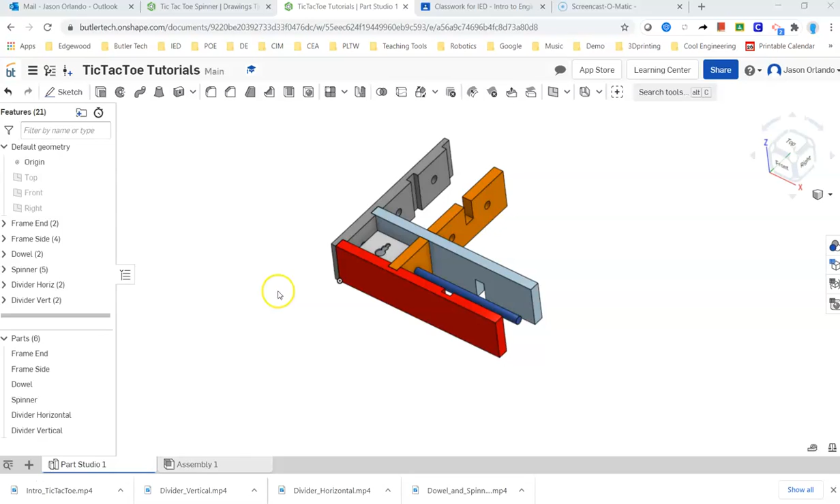Okay, welcome. We've got our 6 parts built and we are going to complete the assembly. I'm going to go ahead and move over to the assembly tab, and I'm going to work in the order in which I built the parts.

So the very first piece that I had modeled was the end of the frame. I'm going to select that from my Part Studio. I'm going to hit the little green check mark, and by hitting the green check mark and not using my left mouse button to click over here, it's going to place it in the assembly area relative to the origin, the way it was in the Part Studio relative to the origin.

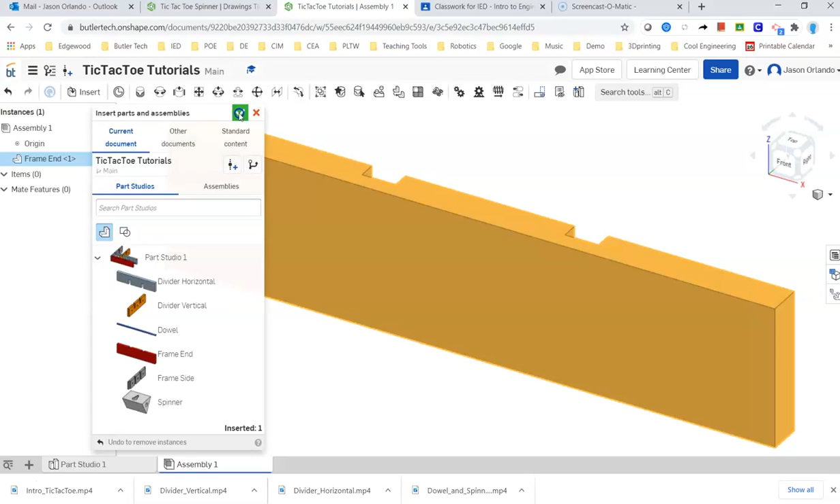Now, it's not fixed, so I could click and drag it and move it like that. I'm going to undo that move. I'm going to go ahead and right click and choose Fix. That's going to lock it in space so that I can't move it relative to the origin. Now I can pan in my graphic window, but notice the origin's moving with it.

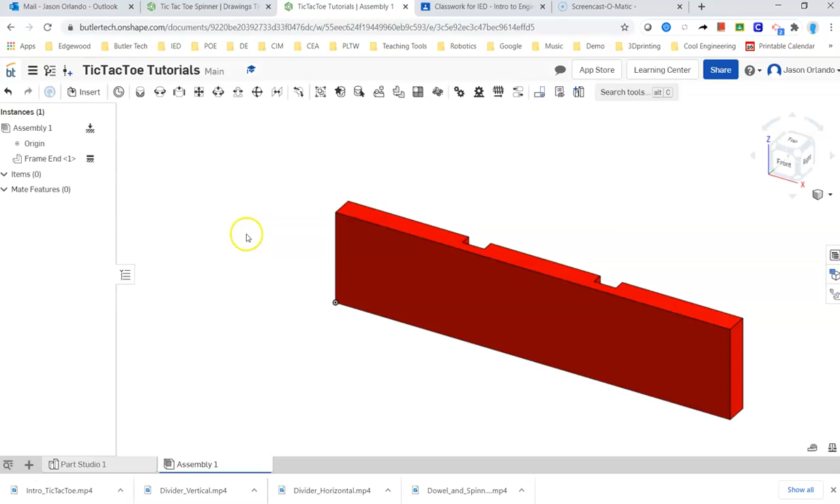Okay, let's go ahead and bring on then the side. Again, it's going to put it where it was relative. I'm going to hit the green check to accept that. And now we're going to use a Fasten Mate. That removes all degrees of freedom.

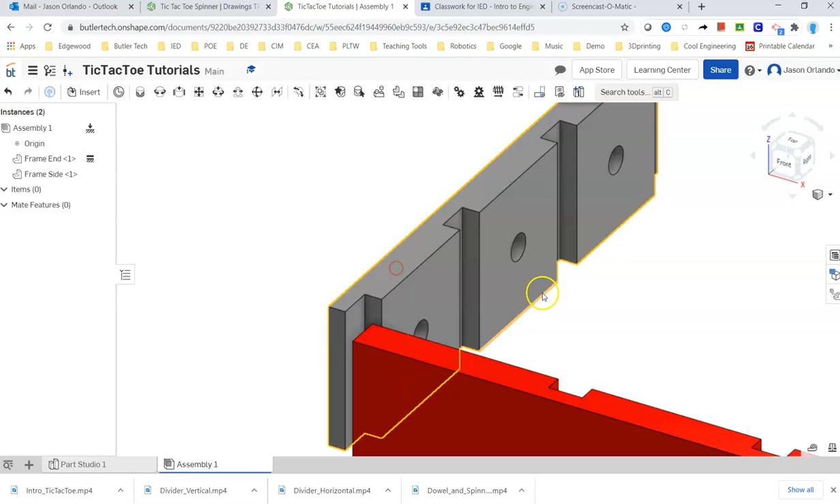I find that it's helpful to move this just a hair away from the other part. Makes it a little easier as I'm selecting things and kind of get an orientation where maybe the two pieces aren't overlapping from my view, where I kind of know what I'm going to select.

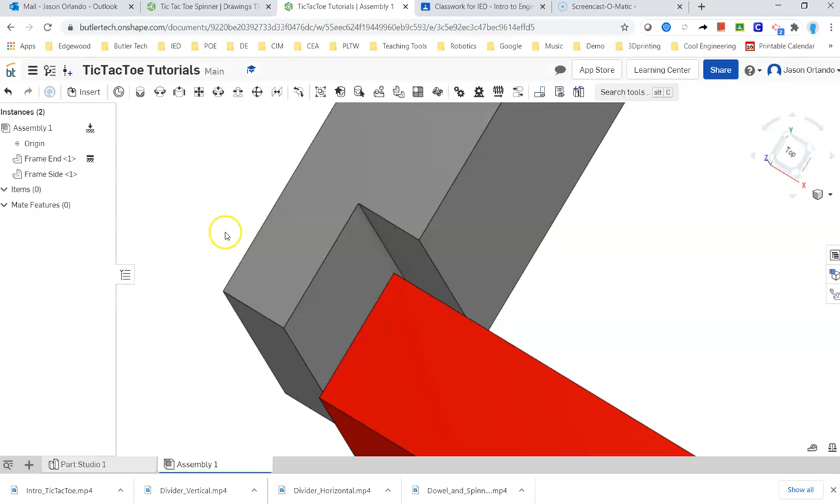I'm going to get that corner right there to match up with that corner, and at the same time I'm also choosing those planes. So I'm using the Fasten Mate tool right here, and I'm going to hover over this face and then approach that corner. Notice that that disc for the mate connector is parallel to that plane.

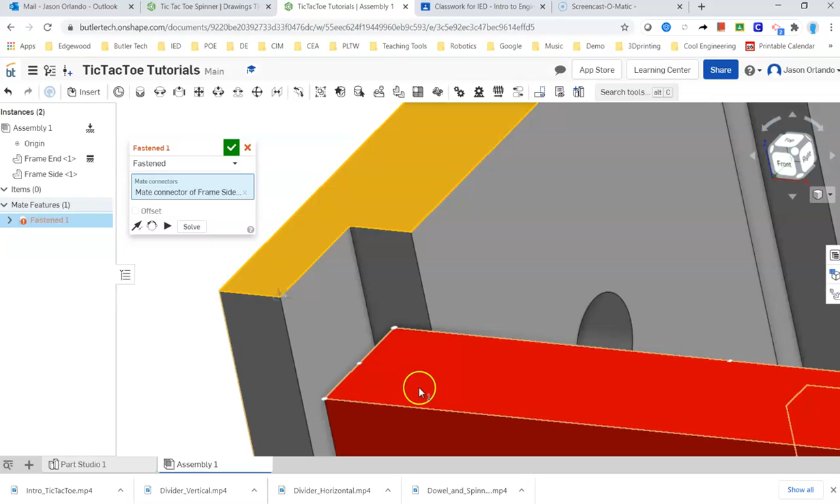Then I'm going to come on this piece, again hover over that face to kind of understand the geometry, and then approach that corner, as opposed to, say, coming from this face to that corner. Notice that the disc rotates. So I want to be on that face and that corner. It's going to bring those two corners together, and I'm going to accept that.

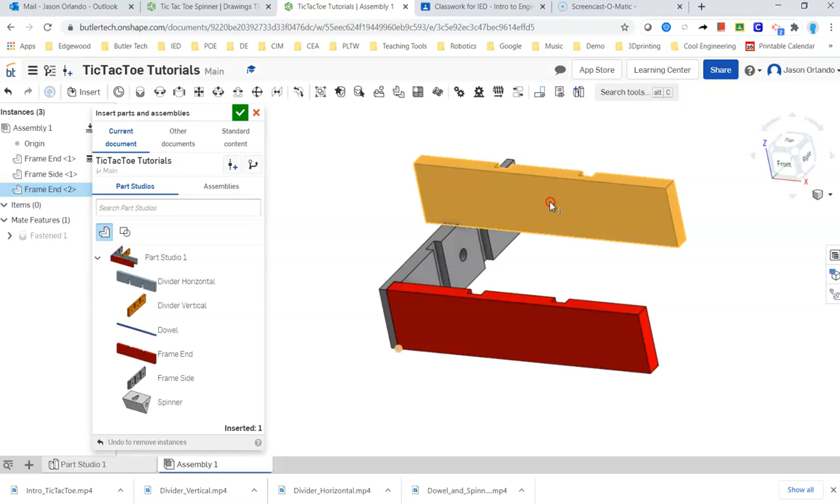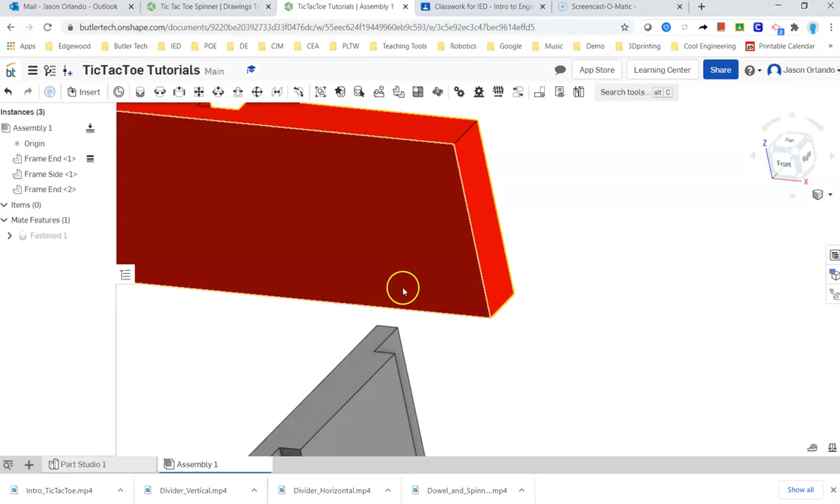Alright, next let's go ahead and bring on another end piece. So insert, frame end, and this time I am going to just left click. Now this piece, I'm going to think of this end kind of rotating around over here, and as I do that, this edge is not going to fit in here. It's going to be that edge that rotates and faces around towards me. So this corner is really going to nest right into that corner.

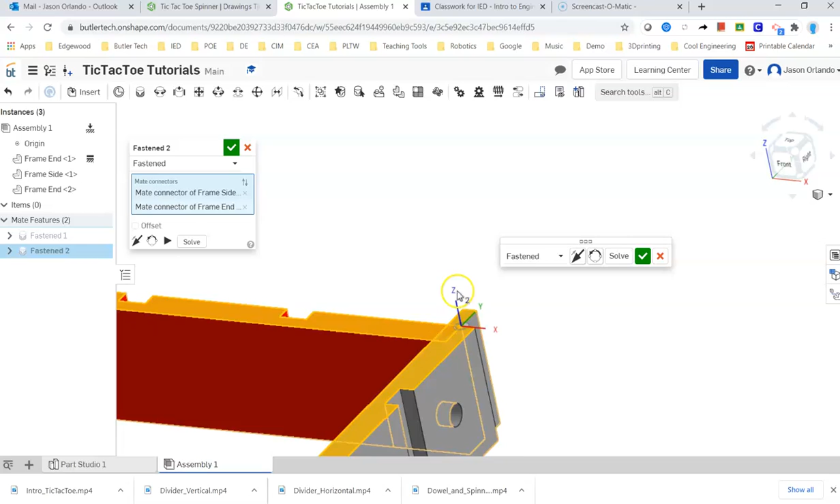So let's use the Fasten Mate again from this face and that corner. There we go. And then this face and that corner. Now Onshape doesn't know exactly how I wanted to do that, so I'm going to reorient the second axis in this menu. If I click this, I can cycle through some options and get it where I want it, and that looks great. I'm going to accept, and I'm going to repeat with now the other side piece.

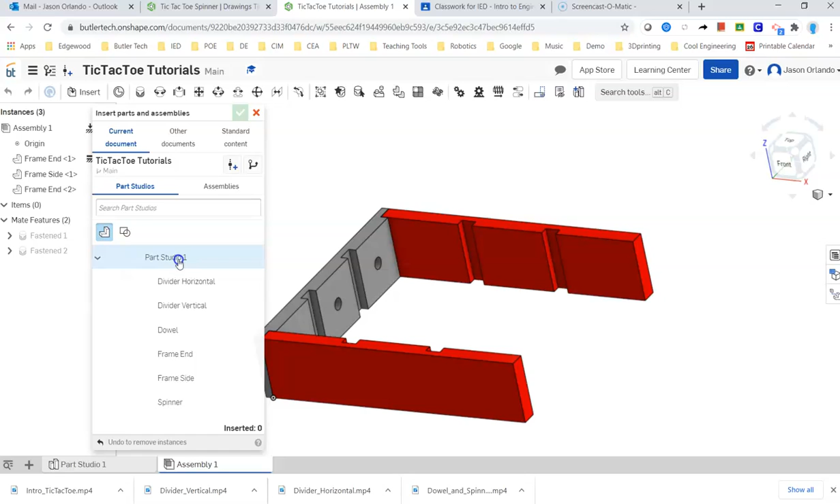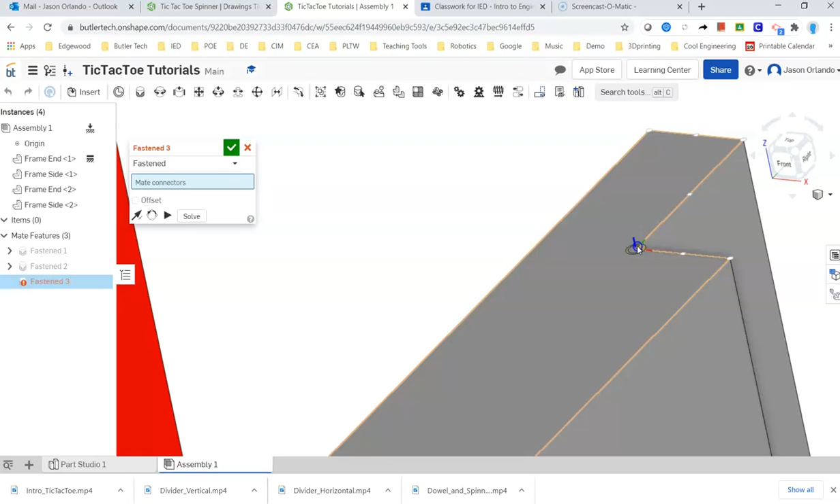So let's insert, we'll put it over here, Fasten Mate, and again, I'm not going to think of flipping, I'm going to think of rotating. This side is going to rotate and come all the way over here. Alright, so nested into this corner, right? That's going to spin all the way around over here and mate with that corner. Alright, again I'm going to cycle through some options, and that looks good. Okay.

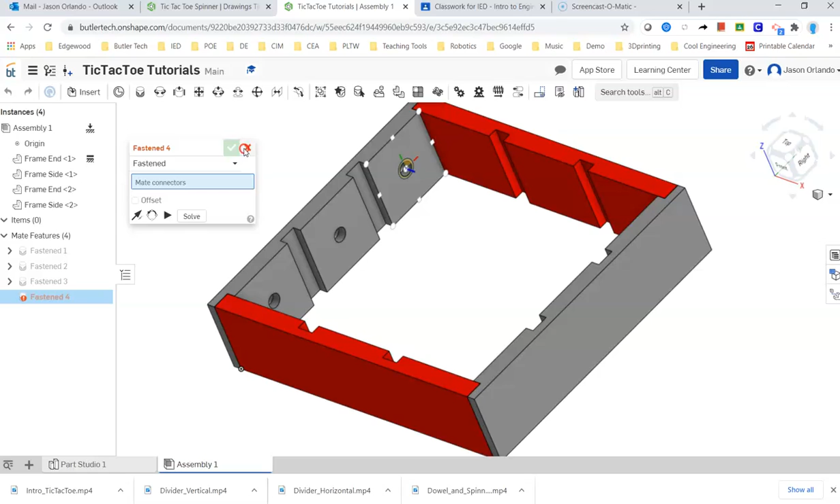Next up, let's go ahead and... I don't know if it's going to be easier to bring the dividers in or the dowels. It shouldn't matter. I think we're okay. Let's go ahead and try bringing the dowels in.

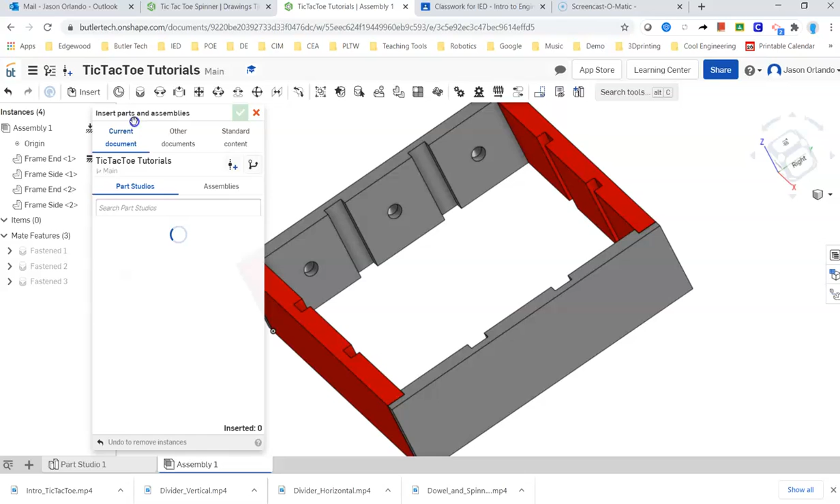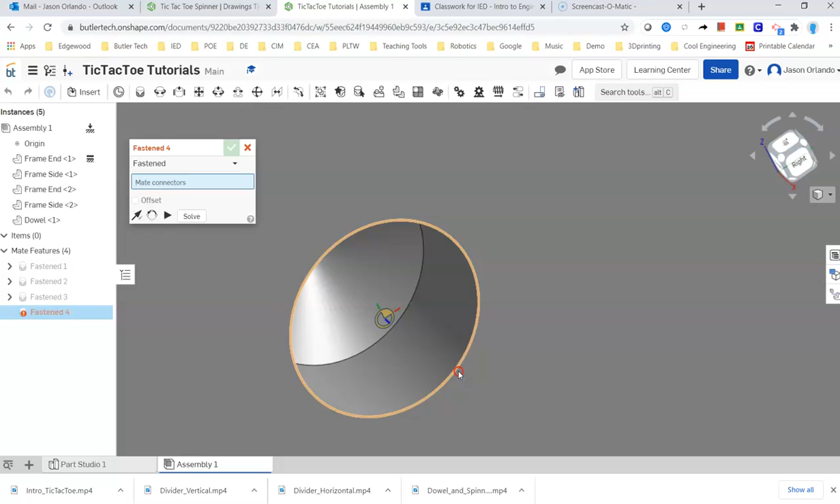Again, I can hit that green check, but I am going to move this so that I can see the ends. I'm going to use the Fasten Mate again, and I want to get right inside that hole. I want that circle that's on the inside, not this outer edge. So I might have to move my mouse, I might have to change my zoom, I might have to rotate a little bit to be able to get that. Alright, and then that is going to mate with the end of my dowel.

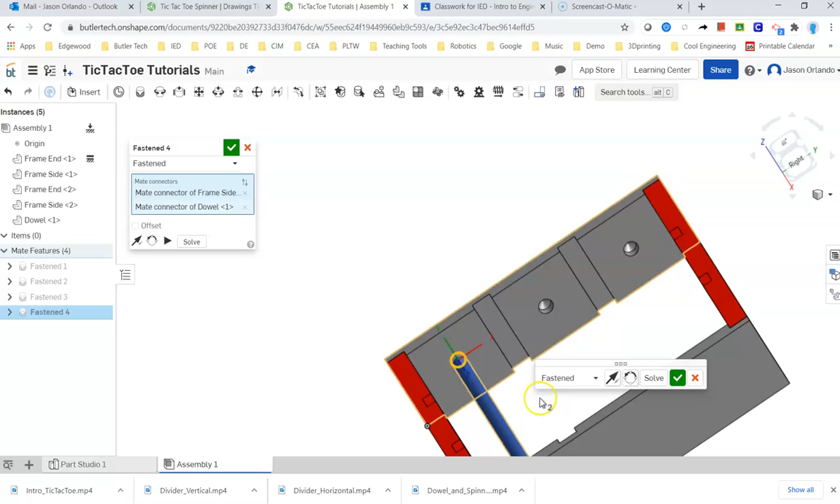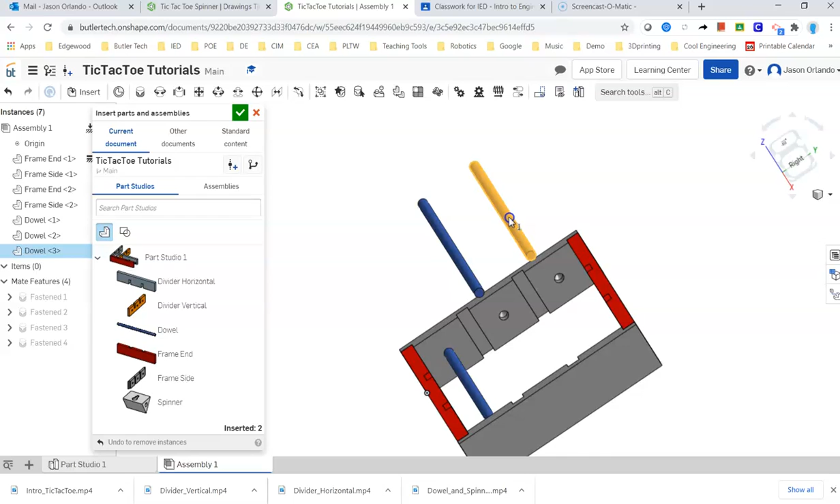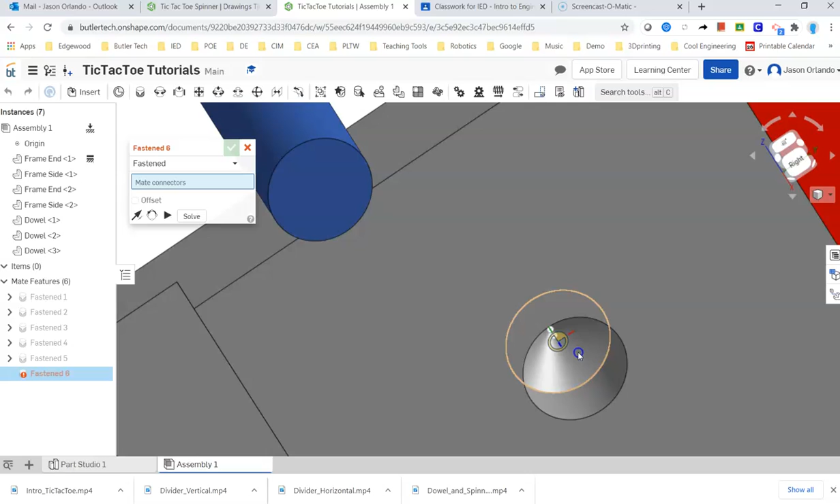There we go. And sometimes it may be going the wrong direction. So this reverse, kind of flip the axis arrows, reverses that, and make sure you get the right one. All right, let's go ahead and bring on 2 more dowel rods. We'll repeat the exact same step. Zoom in, get that inner circle. Flip the axis. There we go.

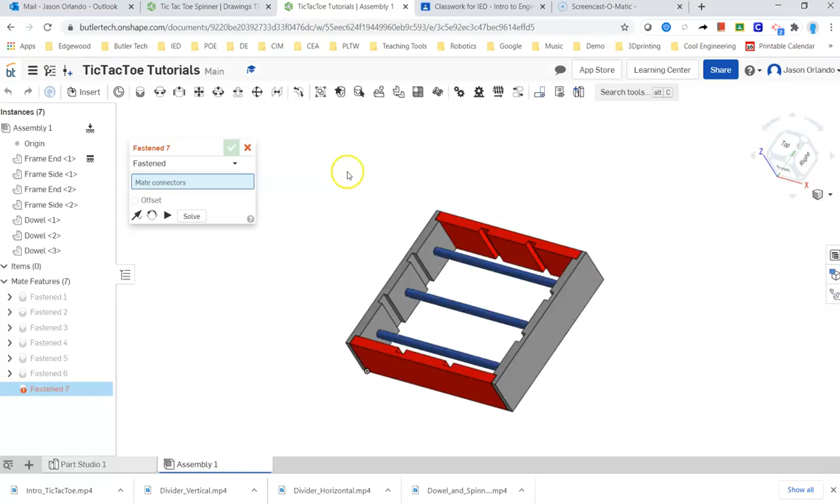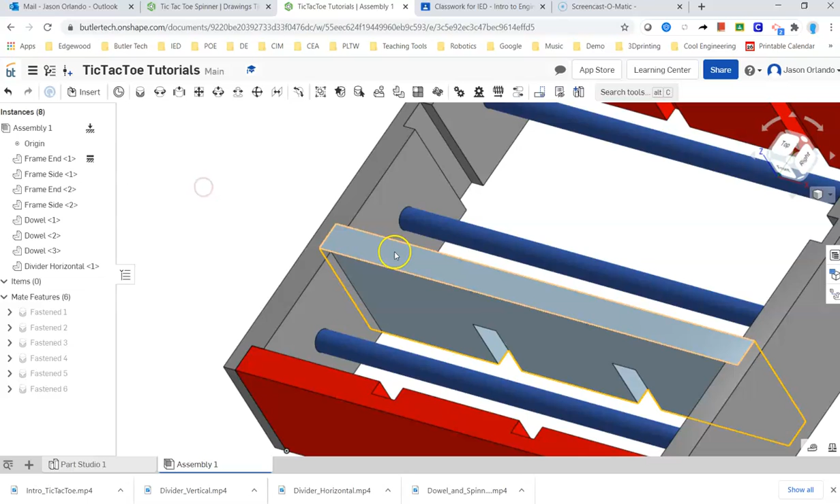All right, next, our horizontal dividers are the ones that are going to go parallel to the dowel rods. So let's try bringing those in first. Let's see, divider horizontal, there it is. Again, if I hit the green check mark, it puts that first one exactly where it was modeled in the Part Studio. I find that easy, and then I can just click and pull it away just a hair. To use the Fasten Mate, I'll get that corner to align to that corner. Accept. And let's bring on the other one.

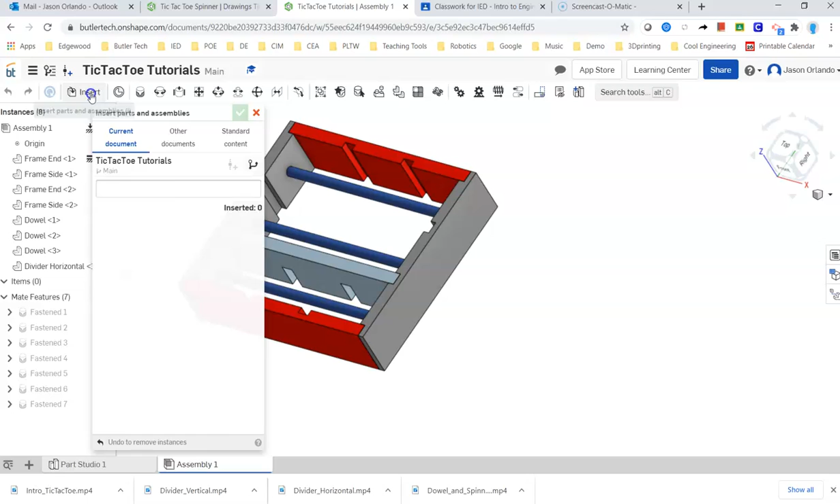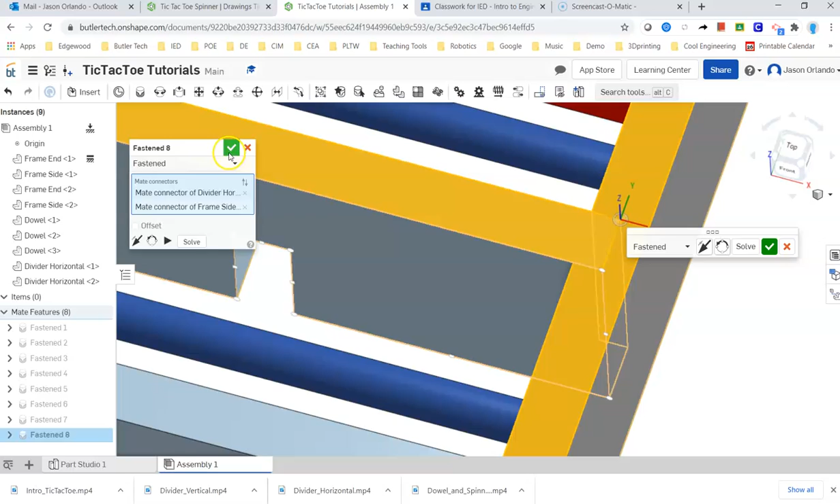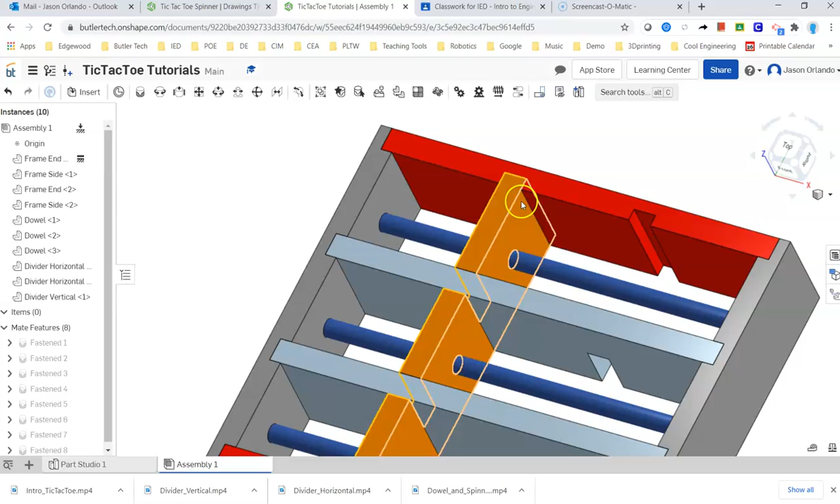I'll use that one over here. That corner is going to nest right into that corner. All right. Let's go ahead and bring in our vertical ones. Let's see, insert. Vertical. Accept. Again, I'm going to scoot that just a little bit.

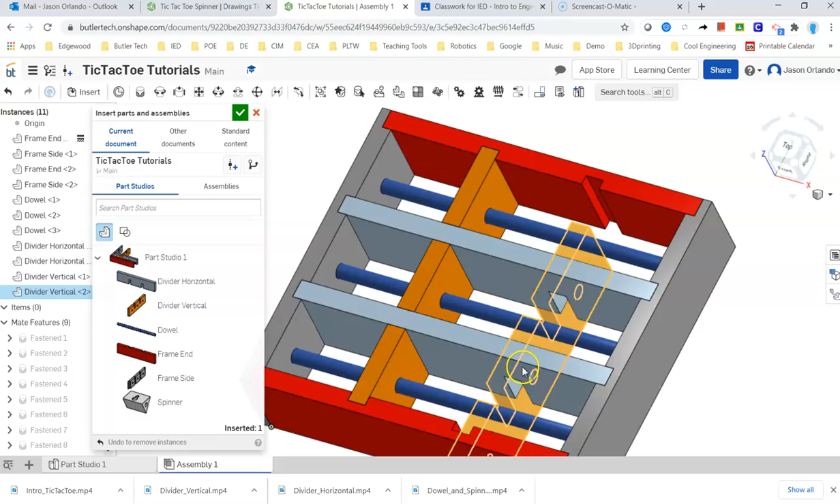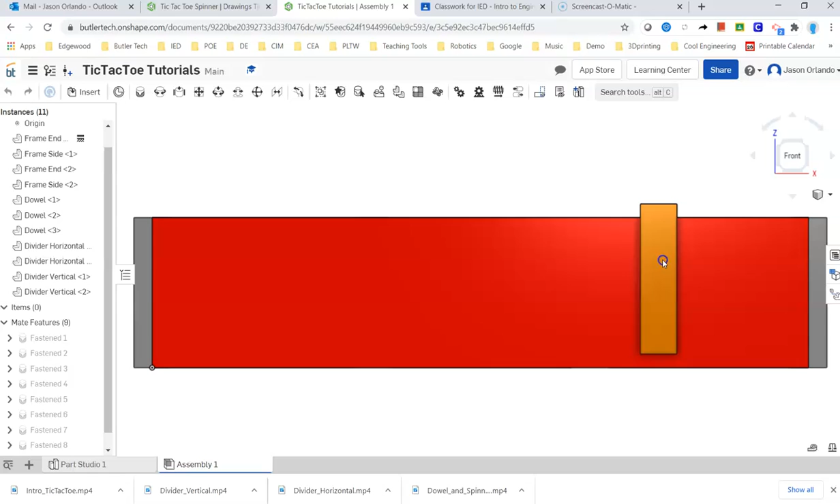And kind of placed it down in space. I can always come into an orthographic view and kind of drag it and change that orientation if that helps. So in the orthographic views, I have better control over where it's going. When you're in isometric, sometimes it's hard to tell or control which direction it's really moving. Fasten Mate, get that corner and that corner. All right, there you go. So we've got everything except the spinners.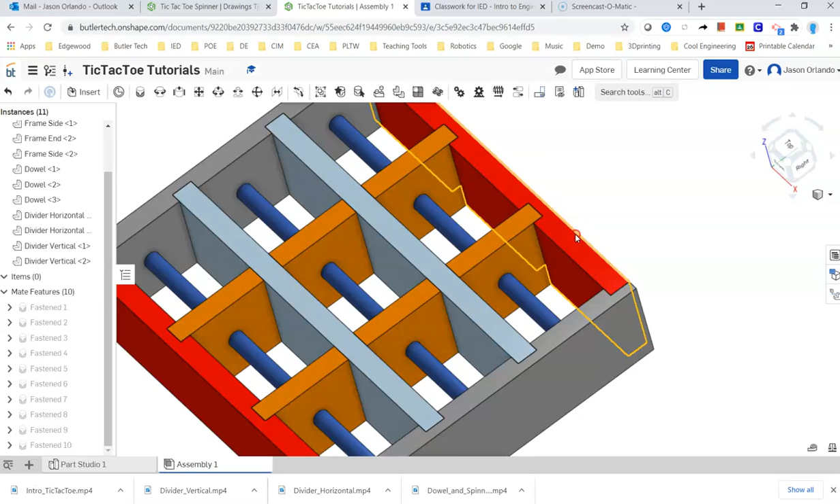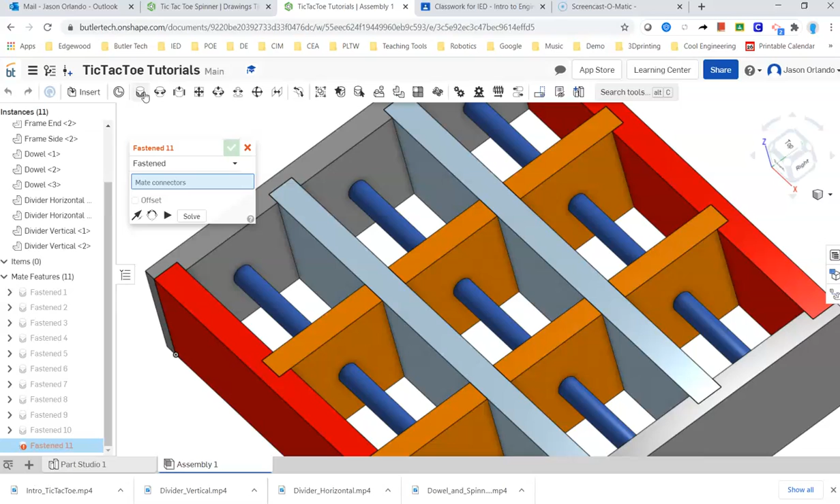Now the spinners, they are going to be a little different in that we're going to have to create an offset. The distance here, this width, was 1/4 of an inch bigger than the spinner's length. So we're going to create an 1/8 inch offset when we bring it in. The other thing is that I want it to actually spin in the assembly, so I'm not going to use a fastened mate, I'm going to use a revolute mate. Once you open any of these mate windows, whichever one you pressed, you can change right here in this tab the type of mate. And so right now we haven't talked about any of the other ones other than fastened. So this will be our first time in my class using revolute.

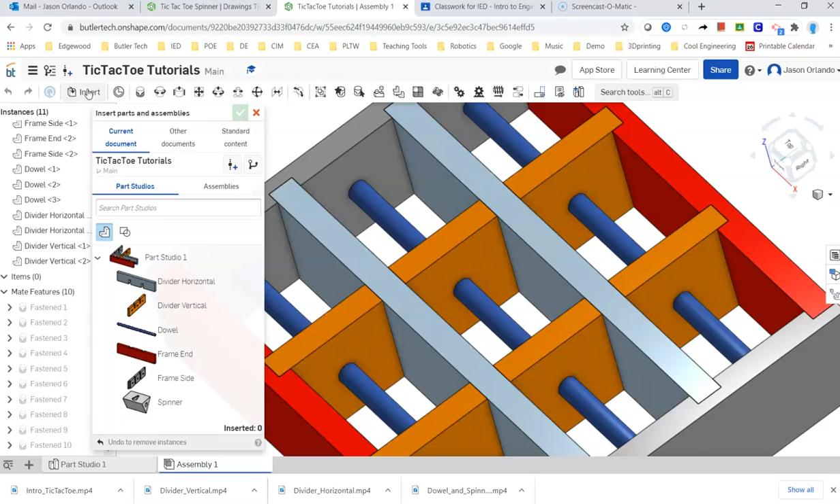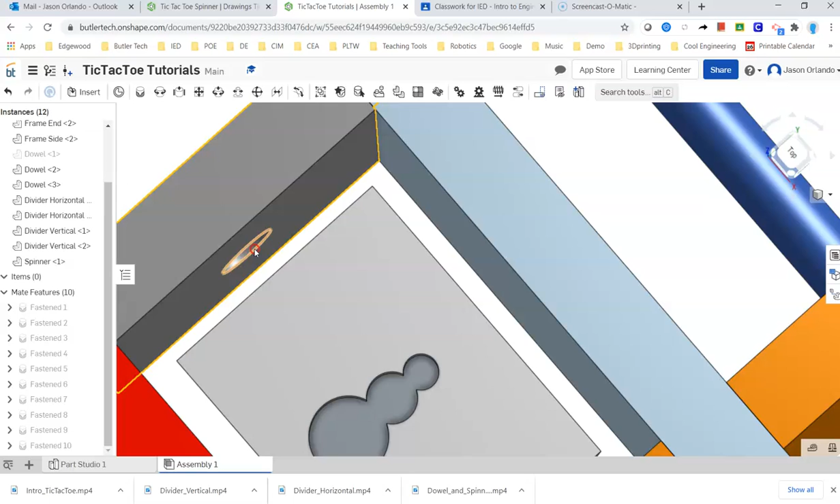Alright, I need to bring on a spinner first. Alright, so that's kind of exactly where I modeled it, which is the right place. But I actually think it's going to be helpful to hide the dowel, because I'm going to basically align it to the hole and kind of get the offset from the edge there. So I'm going to zoom in and notice there's a mate connector that's right in the center of that hole. I'm going to choose that. I'm going to rotate my view a little bit, and I'm going to come in and get the center of the hole.

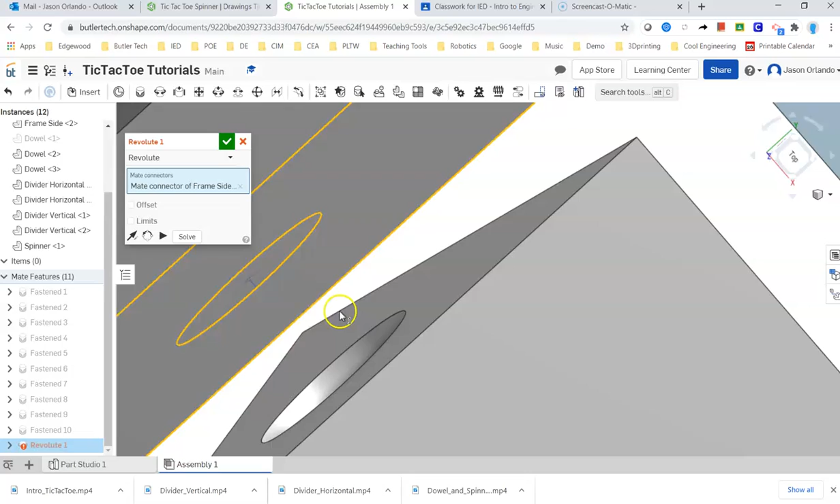Okay, now at the same time, those mate connectors, it brought those planes together. You see that? So it slid it over. I'm going to choose this box in the menu to create an offset, and then I'm going to change this offset to 1/8 of an inch, 0.125. Now it might go in the opposite direction that I want. I'm going to hit enter to get a preview. Yes, it did. I kind of thought it might. So I'm going to change this to a negative 1/8 of an inch, and it moves it away.

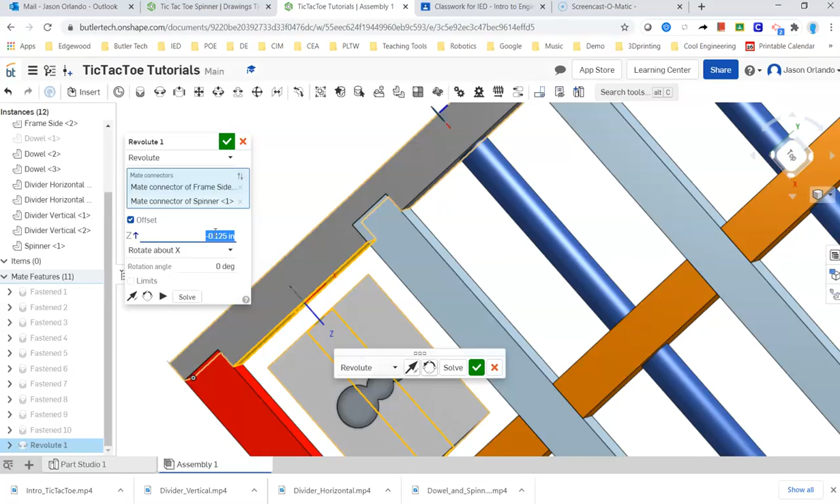I'm going to accept that. And now I know the dowel is not there, but if I try to move this, you'll see that it revolves still. So I've not removed all degrees of freedom. I basically picked an axis. I've kind of picked points that have to stay aligned, that when connected, if you could imagine the line that would run through them becomes our axis, and then those mate connectors, those discs, those planes have to stay parallel.

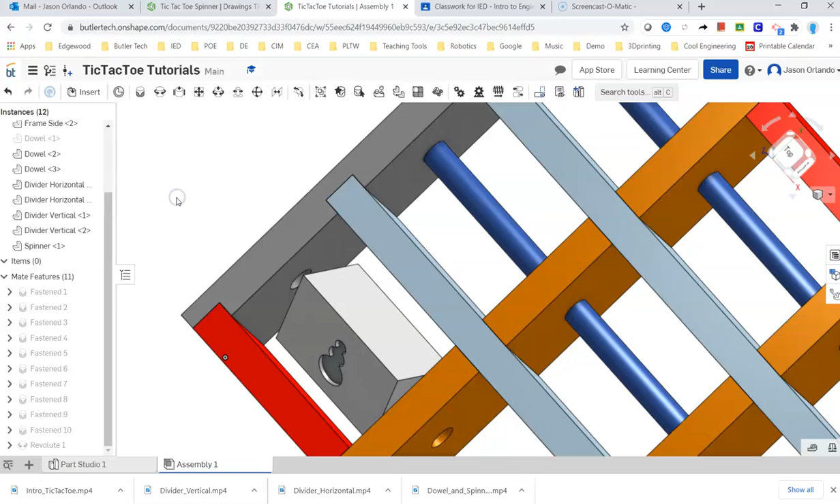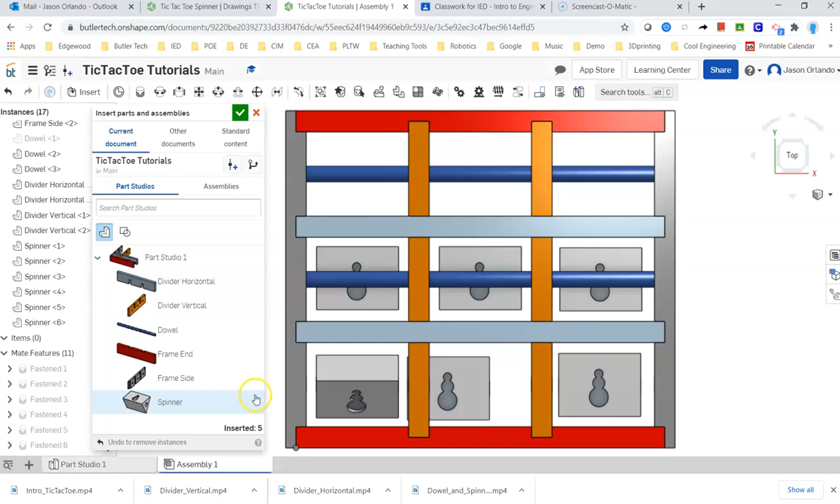Okay, so let's bring on all of the other spinners, and at this point you probably get the idea, and you don't need to watch me do 9 of them. Maybe you want to see me do one more, but I would just repeat the process until I get them all done.

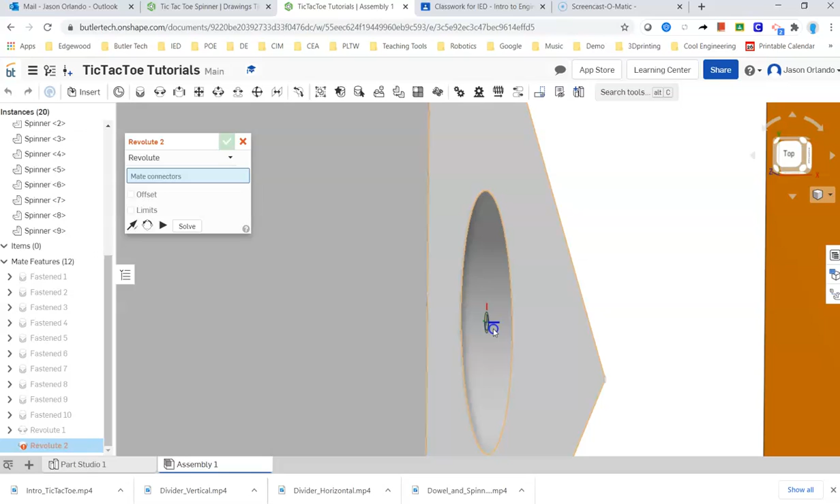Okay, so again, it's the Revolute mate. We're choosing Revolute here in that drop down, and going in, getting the center of the hole on the spinner. No, it doesn't want to get that. I'm clicking and it doesn't go, and then I finally get it and it shows up twice. Sorry.

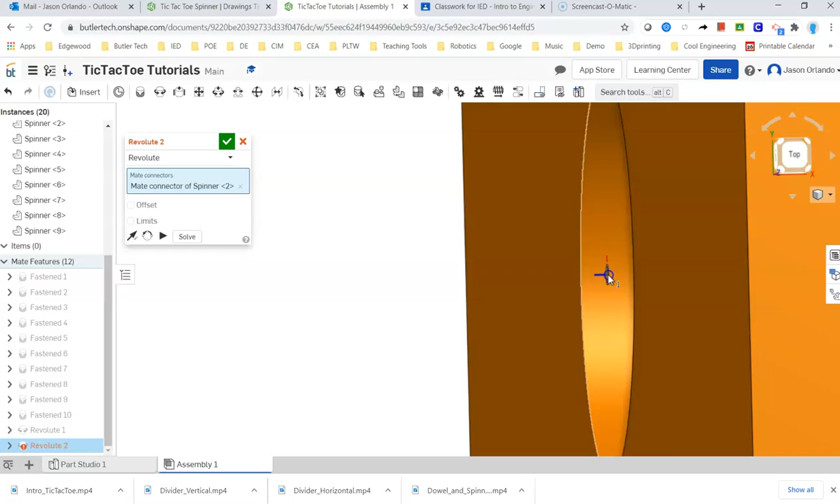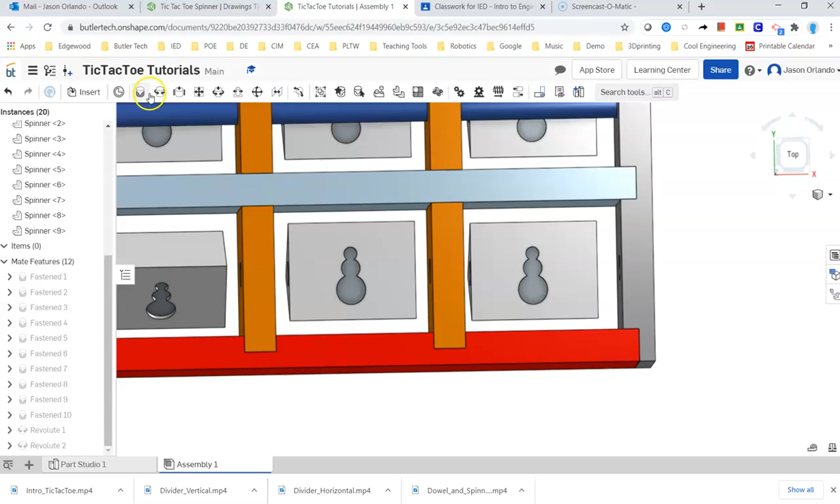Alright, so we get that, and then we're going to choose the offset, and we'll try negative 0.125. This one needs to be positive, which I thought, because I'm coming from the other side. Alright. I'm going to accept, and now I didn't actually have to turn that menu off. It was ready to let me kind of keep going with that same type of mate. That one's down below. Offset, negative 0.125.

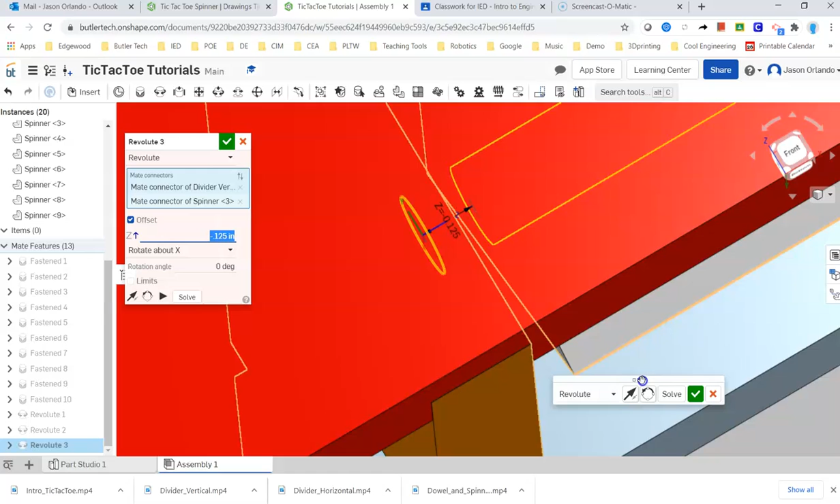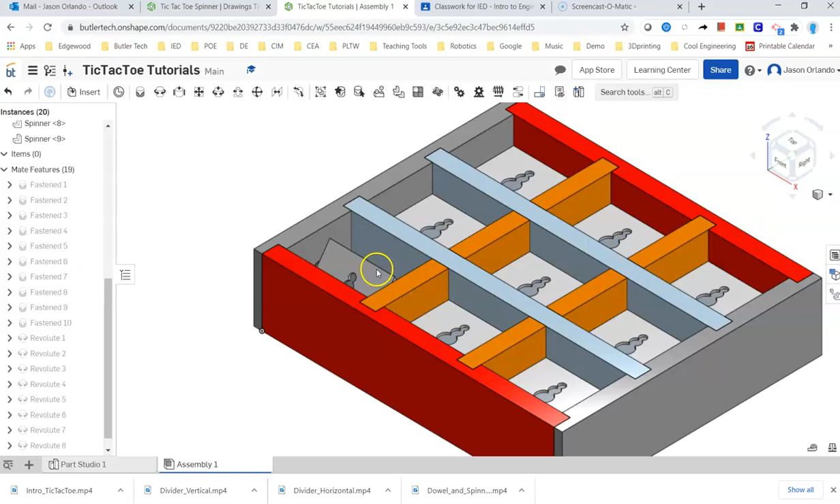Alright, so you can see how those are working, and I'm just going to continue on. And there I am. I've finished all of them. The only thing that should move now is the spinners. Now I never did go back and add a different logo for another side, so that's something I would need to do to finish off, and I might go back to my Part Studio and edit some of the appearances. But that does finish up our assembly.

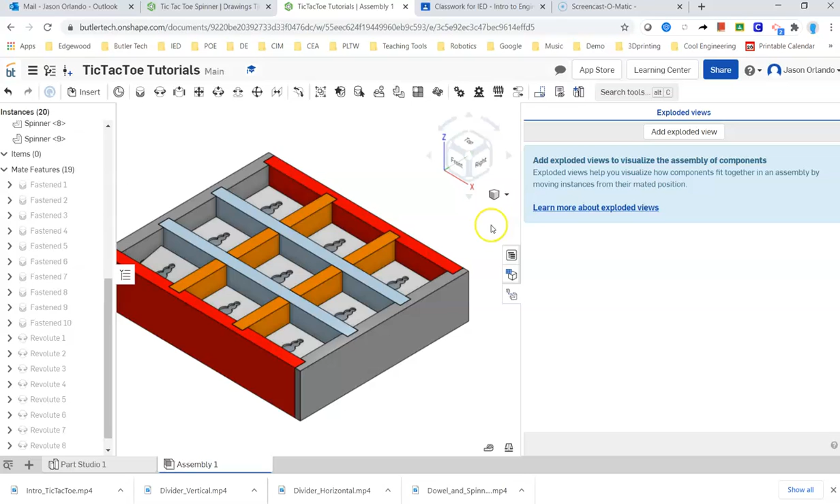To create the exploded view, I would pull over these panels right here. The third one down is the exploded view. You have to choose Add Exploded View. This little notification pops up that says that you're editing Explode 1, and when you're done doing all the pulling and tweaking, if you will, you'll hit the Done button.

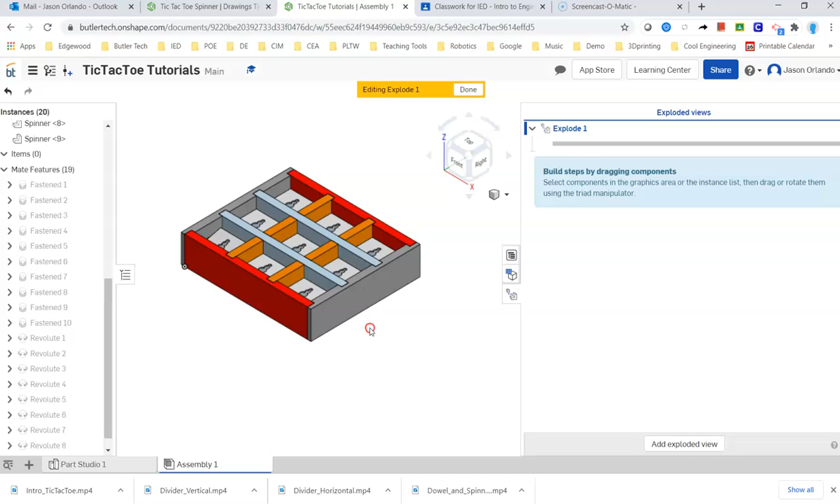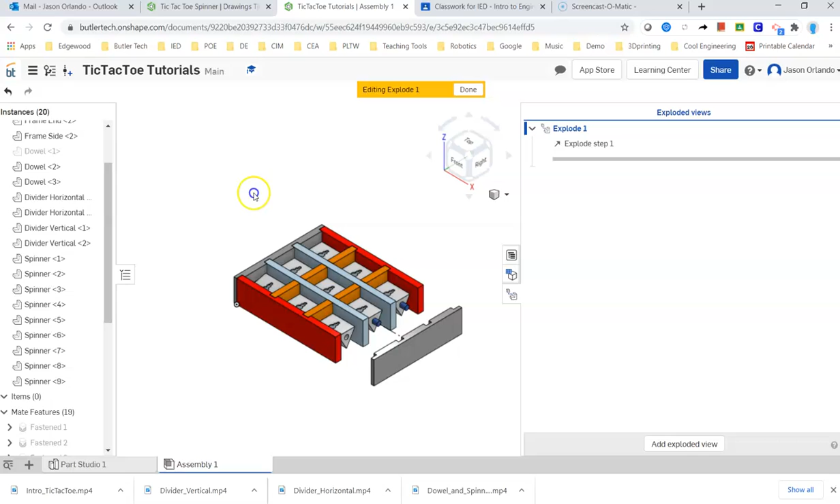This is pretty easy. You simply grab a part, and the triad comes up, and you're going to use the arrows to pull it apart. Okay, and then if you like that step that you did, hit the little green check mark here. Don't hit the Done here till you're done exploding all the parts, but you'll get steps up here. Click in the white to deselect the part and to start again. So I'm just pulling it all apart.

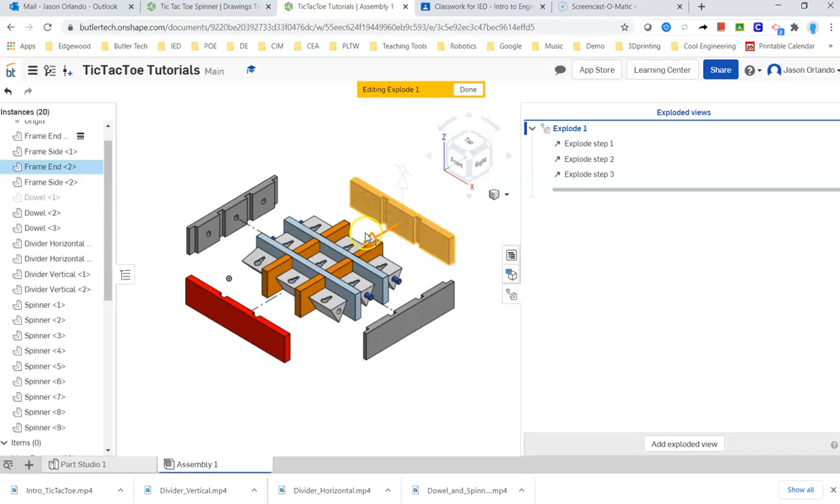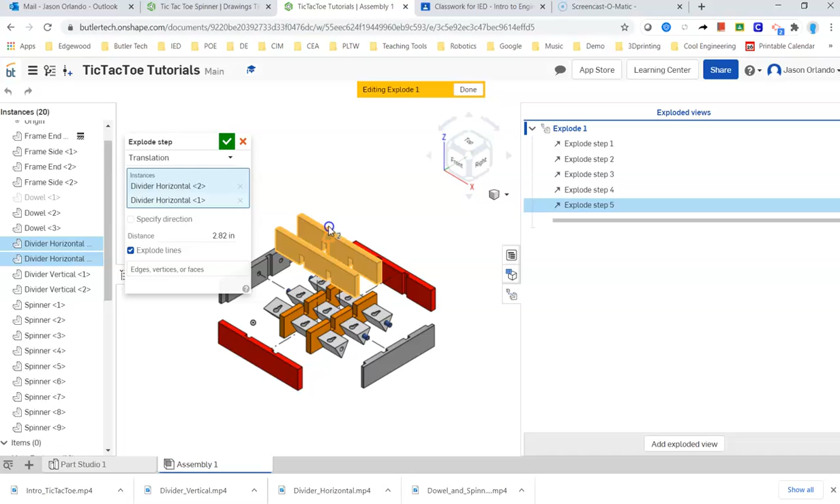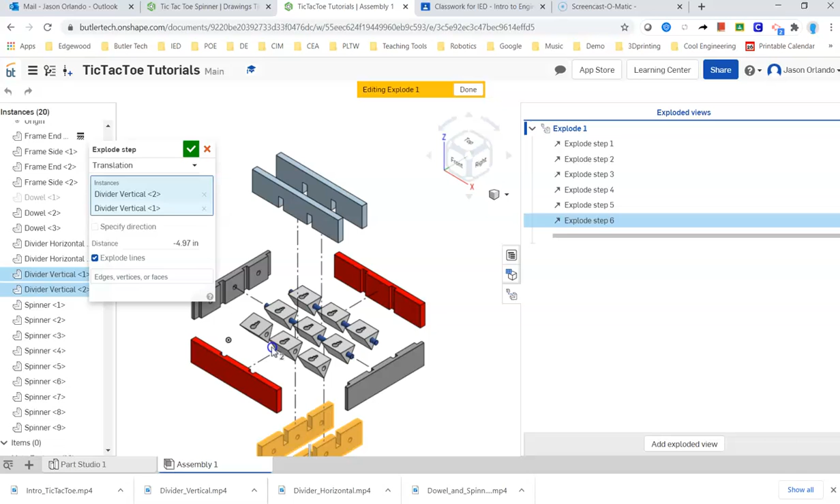I can move multiple parts at the same time, so my horizontal dividers, I can get both of them selected at the same time and pull them both up. Let's see, I want to do all this in the isometric view, okay? Bring the vertical one straight down. And I might leave it like that. Kind of good enough.

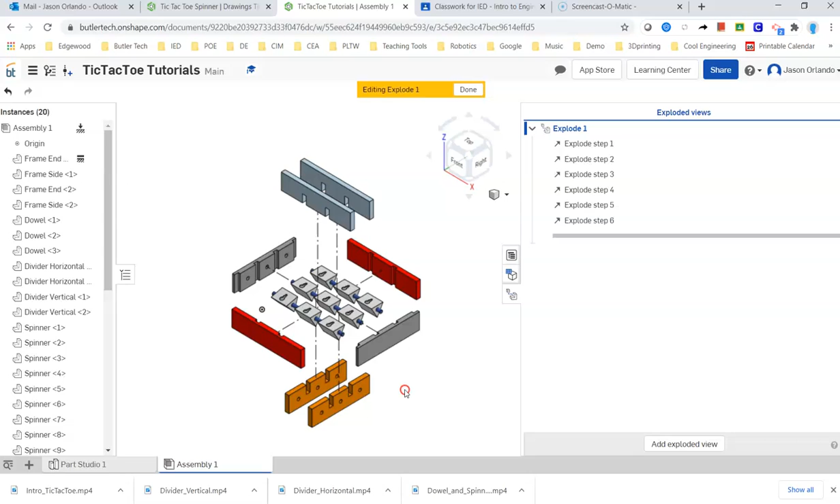I do have one of my dowels hidden. I'll bring that back on. But there you go. It shows, for the most part, how it all goes together. It's a pretty good view. All right. So when you're done with that, you just hit Done right here. And now you have an exploded view.

And when you bring on an assembly view when you're doing your drawing sheets, go ahead and bring on the assembly. But then in the menu, in the drawing sheet, once you've chosen the assembly view, there will be a little drop down where you can choose what type of the assembly you want to bring on. It'll probably say default for the first one. Hit that drop down, and underneath there you'll see the choice of Explode 1. And if you've created other exploded views, those will all populate there.

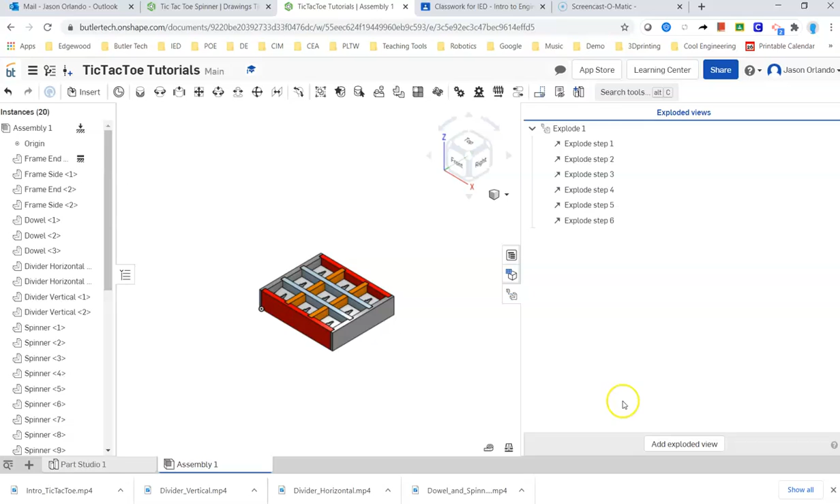All right. So after building and assembling, my next challenge would be to try and recreate the drawing sheets that I provided to you as an example, or as providing all the dimensions. Could you go back and then recreate those documents for yourself from your own work? Good luck.